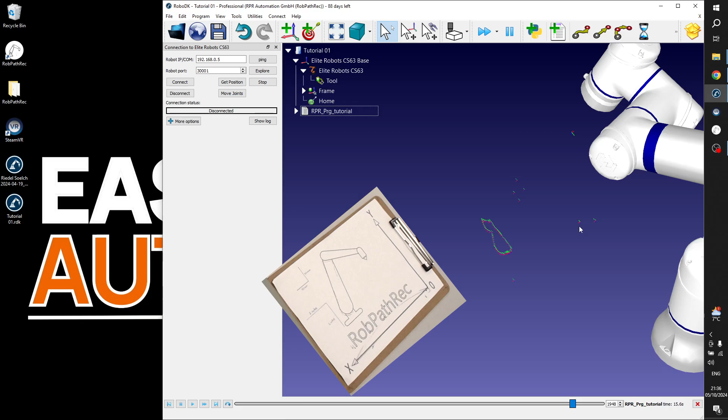One drawback or challenge of this method: you can't do this only with an easy recorded outline. You really need the points from the original recording of the frame, with which we can define a frame.

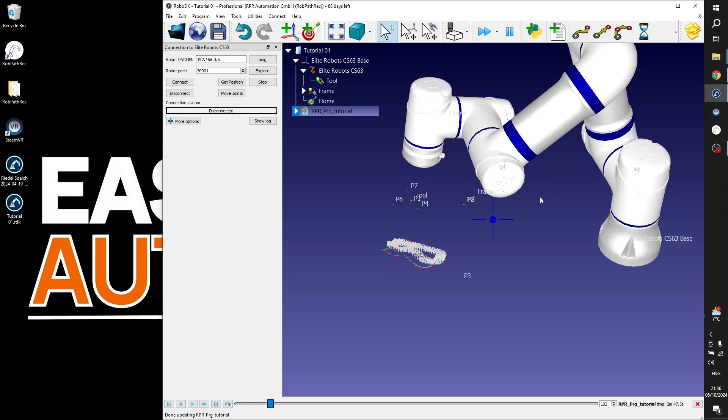I'd like to show you that within this recipe, the robot movement is as follows: we come to P1, which is a kind of midpoint, then we come to the origin. From the origin we follow the x-axis, then we come back to the mid. This will be P4. From the middle we come back to the origin and follow the y-axis.

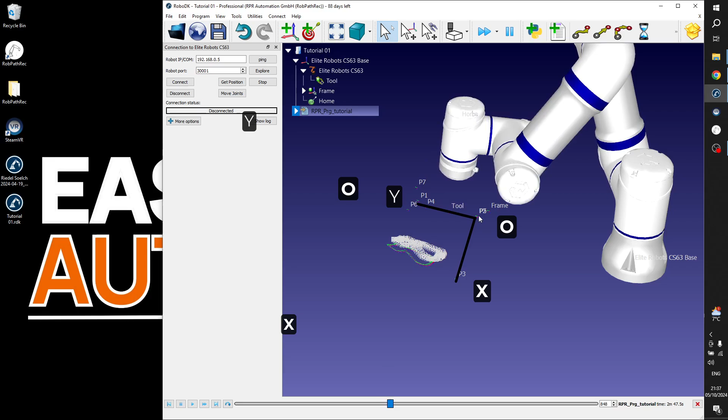This is exactly what we will use: the origin, the x-axis and y-axis points. Once the axis is covered, we come back here again, and then we start with the real recording of our path. Let me make it a little faster.

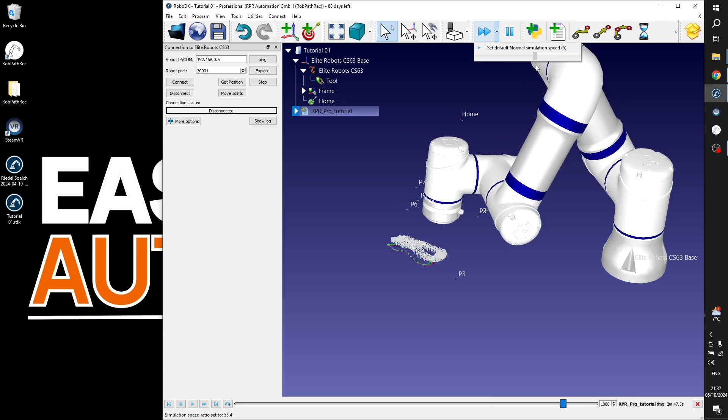So what we will need for this demonstration is the origin point, the x-axis, and the y-axis. I really recommend that in the future, if you're doing complex tasks, after the initial touching of these points during recording, you simply record these 3 points additionally of the frame, because with this we can make any kind of complex adjustment later on.

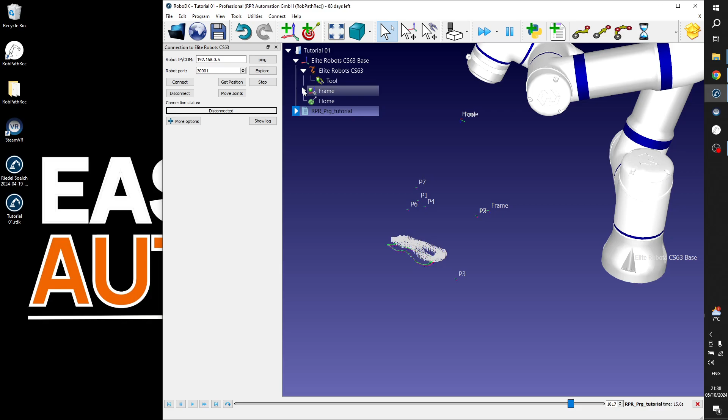In our special case, this is P2, point 3, and point 6, which are defining the frame: origin, x and y.

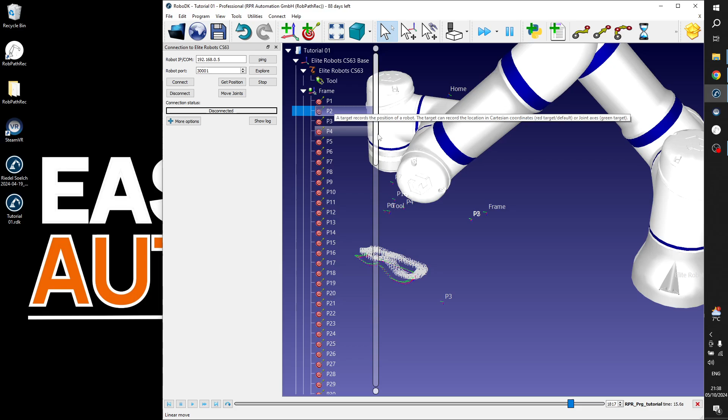So what we should do right now: the recording is already as it is, so we can't change anything on this. What you should do is go with the physical robot, with the tool, exactly to the origin, and then simply add a new target.

So you navigate to the origin point, you add a new target. Here's the new target, and once the new target is added, you just hit get position. The position of the physical robot will be read out and transferred directly to RoboDK. Once the robot on the screen moves to the correct point, right click and teach current position.

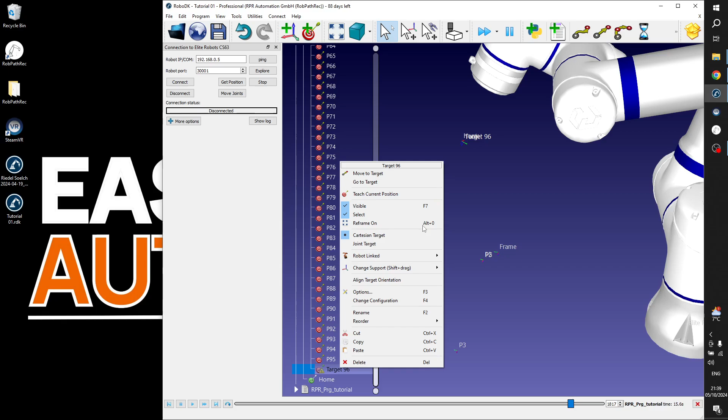We should repeat it with P3 and P6. So you go to the X and to the Y, and exactly the same: you add a new target, get position, and teach it.

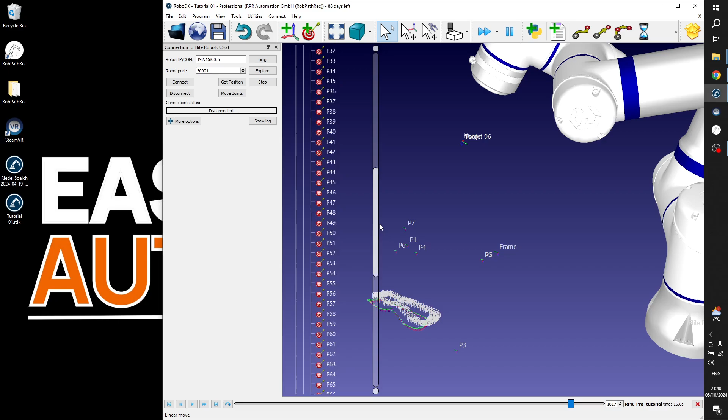I will just fake these points for our lesson here, so I can show you how it should work. And to make it a little more real-life ready, I'll just copy the coordinates of these points here.

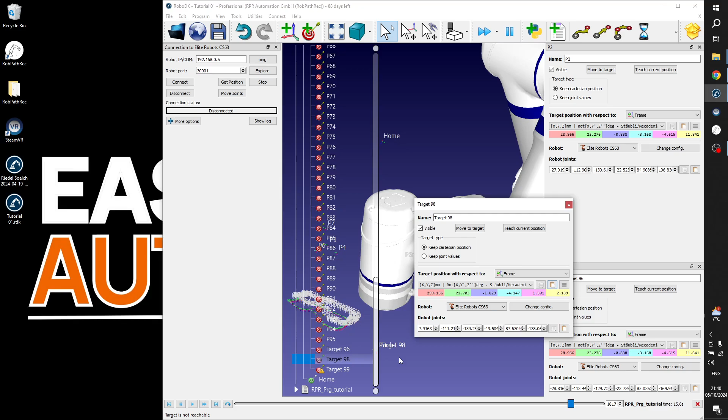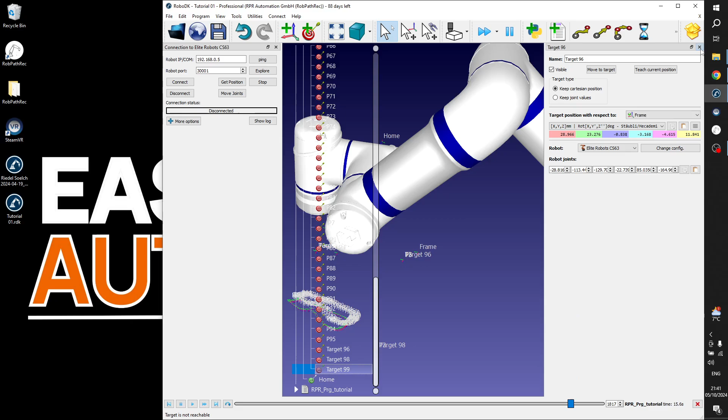Then we need P3, the P3 should be this one, and P6 is our y-axis point. P6 will be this one. I'll close all of these windows, and I'll create a strange offset for this demonstration.

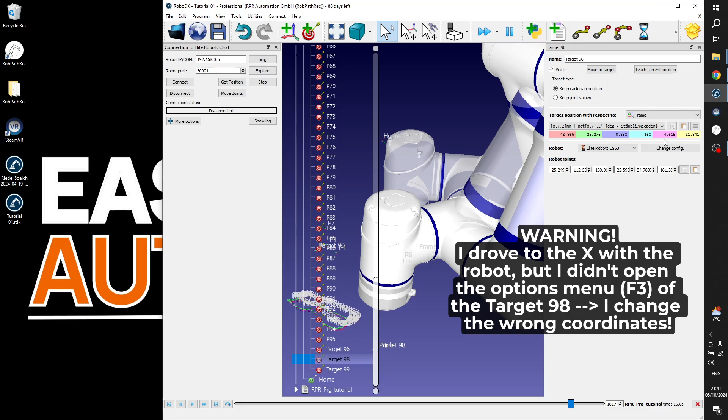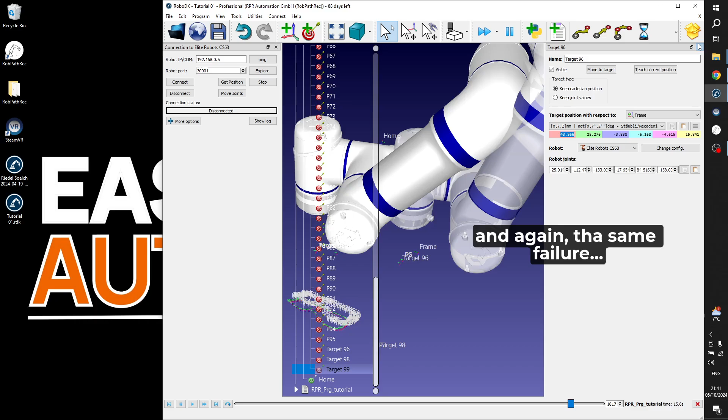This offset will not be as constant as the other one, but we will use a bigger offset on different kinds of parameters. The last one, let's say this should be Z, sorry, with an orientation and maybe some on the X. Great, so we can see that we have pretty different waypoints compared to our original one.

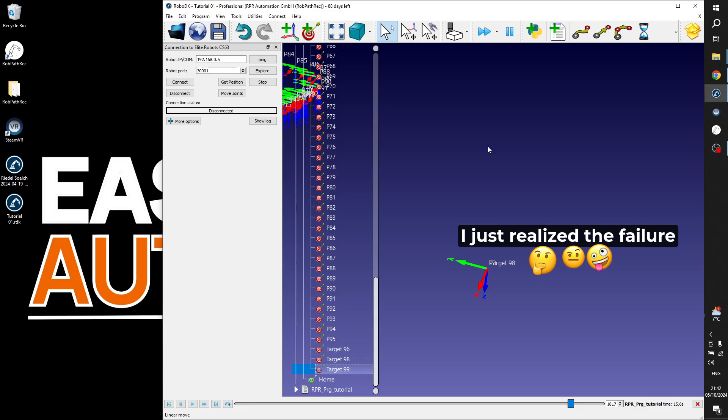And yeah, there is a fair offset. I just check out again if I can still make it a little bit more.

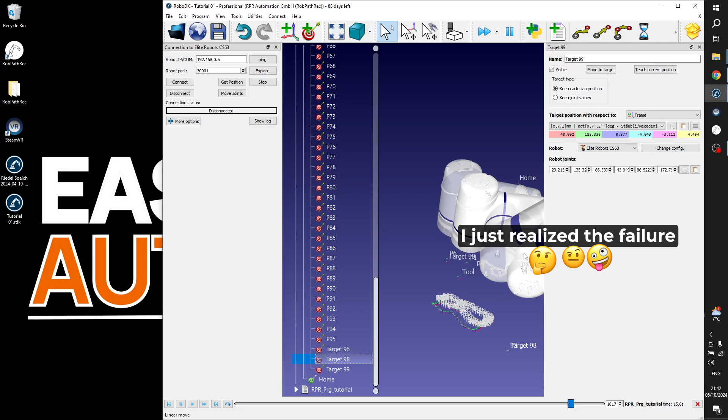Yeah, okay, we will do this in this way, that we can see a little bit more. Oh, this was a mistake from me, because we just want to modify this one.

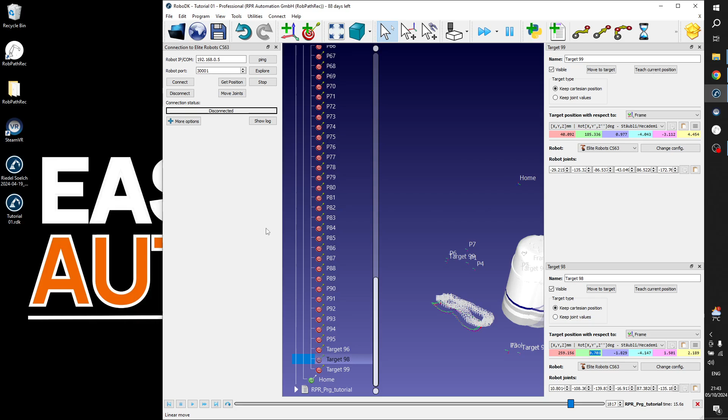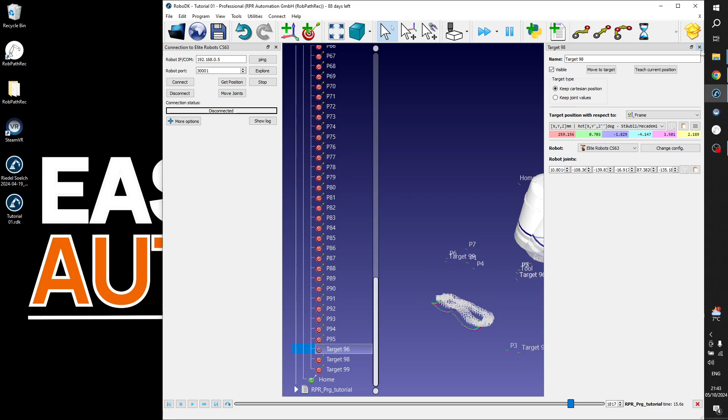Okay, and here again. Okay, so now we should be able to see that we really have offsets between all of this, the P2 to target 96, and so on and so on.

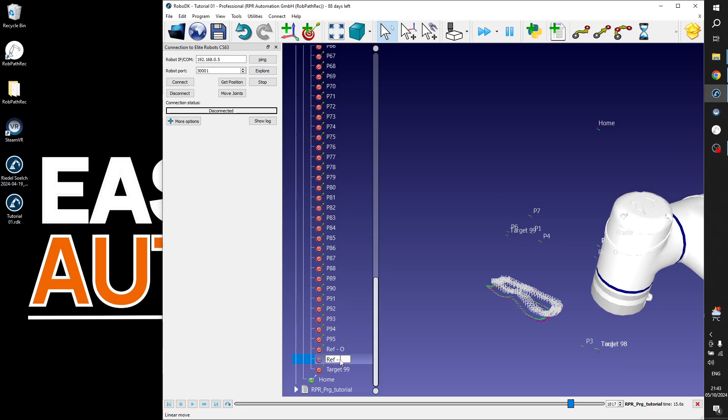I rename them reference origin. This should be our reference X, and this should be our reference Y. Okay, this is very crucial that we do not mess up anything.

So, and right now, because we are still in the frame, we are still in our working frame, I just hit the right click, so all of three are selected, and I change support and I put them to the

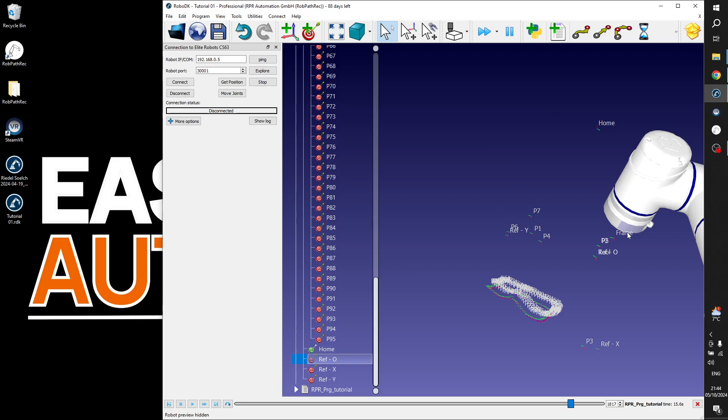base coordinate system of the robot. So you will be able to see the position is exactly the same, but the reference is not anymore our frame here, but the reference is the base coordinate system of the robot.

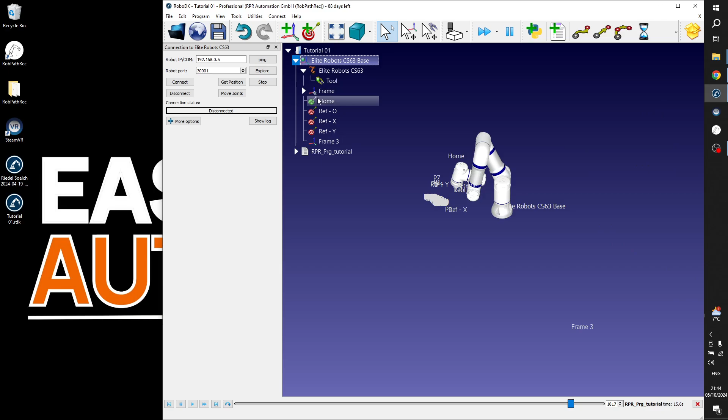So what we do additionally, we select the base coordinate system of the robot, and we add a new frame, and this will be our alignment frame.

So, and this frame will be right now defined. We just select the define reference frame, and we just select the 3-point method.

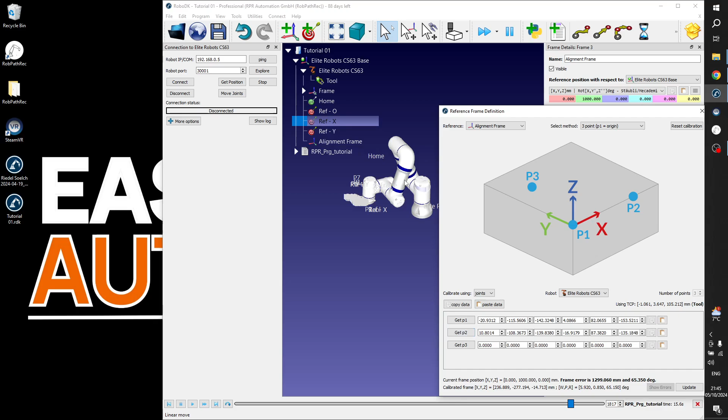First we go to the origin, and we just read in the origin values. Then we go to the X, we just read the X values, and we go to the Y, and we read out the Y values.

So once again, these 3 points, these will be created in a manner that we are navigating really to the points, to the real reference origin, to the real reference X, and to the real reference Y points, which we used earlier for the frame definition here as well.

And we just add these new targets. We just get the position from the robot and we teach these new targets. So we will have the real world new coordinates, reference coordinates for this frame.

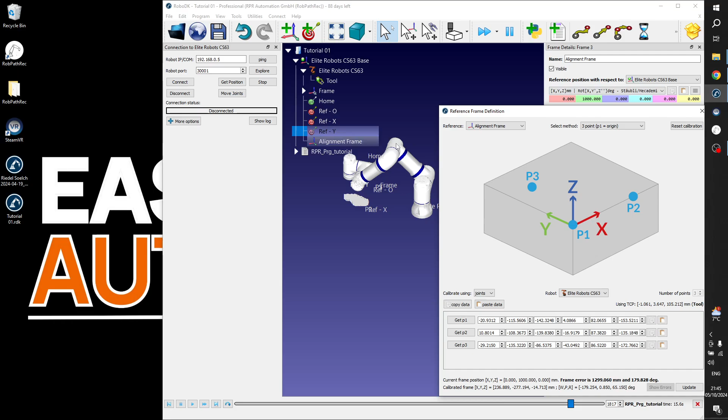Okay, and with these 3 points, we are just creating this new alignment frame. So I just hit update. And you can see here that the frame and the alignment frame, there is a big difference between the both of them.

And this is the offset what we want to apply. So right now, we will do the same trick what we have done. So we just select our improve accuracy tool.

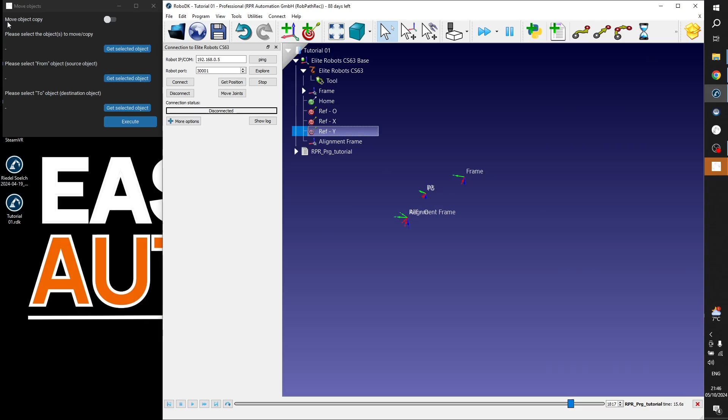Once again, we don't want to copy it. We just really want to move all of the points. And in this case, I select the complete frame.

So on this frame, all of the previous recording is stored. Okay, so I select the frame, and this is the get selected object. This is the frame. The from frame is still our frame, so this was our origin. And the to, the destination, this is the alignment frame.

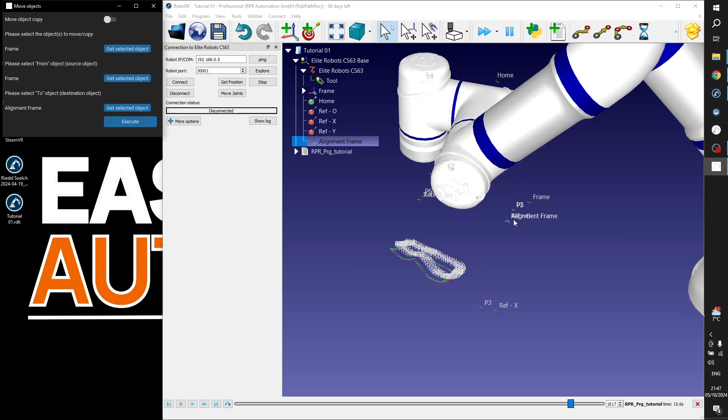And if I hit execute, then with this direction and with this orientation difference, you can see here, compared from this one to this one, you will see that all of these points will be changed, and this is exactly the manner how we have it with the new reference frame.

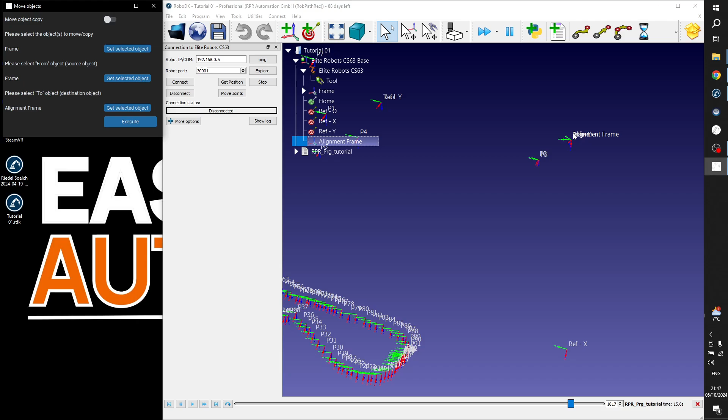Right now you can see that the frame and the alignment frame are on the same position again, and we have all of the new points we have exactly there where we want it to have.

You can delete the added features as the program is still the same. It is just shifted and rotated into the right direction.

With this method, you can really make very complex afterwork, and it helps you to improve the accuracy on very complex outlines.

Nevertheless, we still recommend that you are not creating huge recordings at once, but you really put it into segments, and then each segment can be offset, can be manipulated afterwards easily.

But you can see that this is a very powerful method how you can really shift earlier recordings to a completely new place, so that even the orientation and the rotation will be changed.